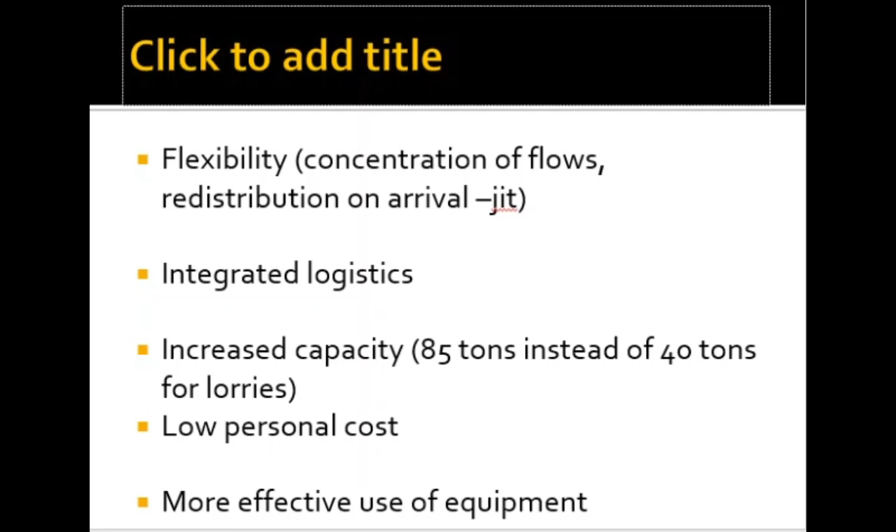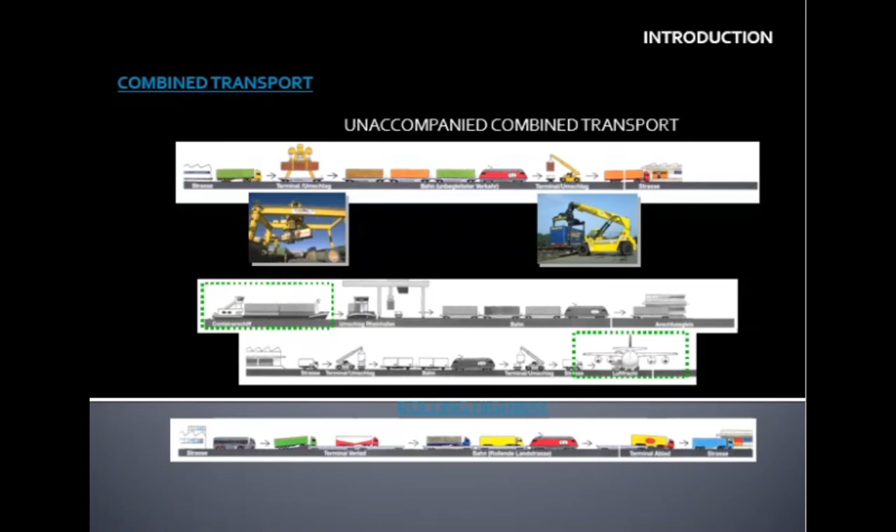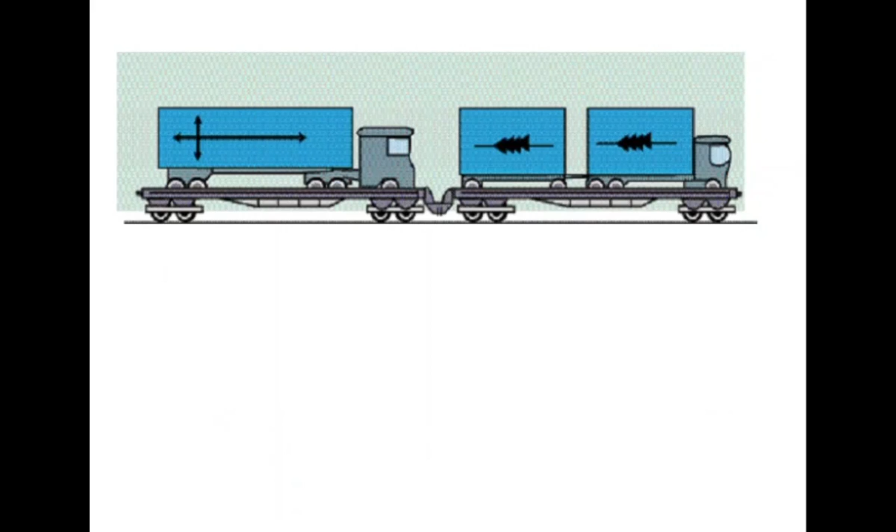Look at this slide carefully. You see that a whole lorry is placed on the flat track. That is what happens in combined transport. So here there are two flat tracks, and then there are two articulated trucks. One is a longer 40-footer, and one is a 20-footer with a trailer at the back. So this is accompanied combined transport.

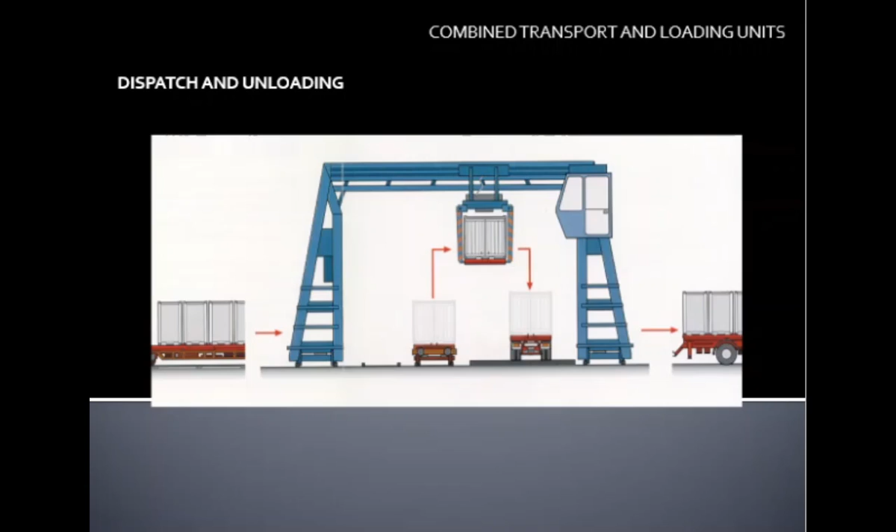This slide shows the kind of gantry cranes used for dispatch and unloading at the terminal for combined transport. You see the truck facing the other side, and the flat cars on the left. The lorry is on the tarmac and drives away towards the right. The train on the left side within the gantry crane brings the load, the swap body. The gantry crane picks it up, lifts it, and drops it on the flatbed lorry, which drives away. So the flat track of the train is on the left, the lorry is driving on the right. This is what happened at dispatch and unloading.

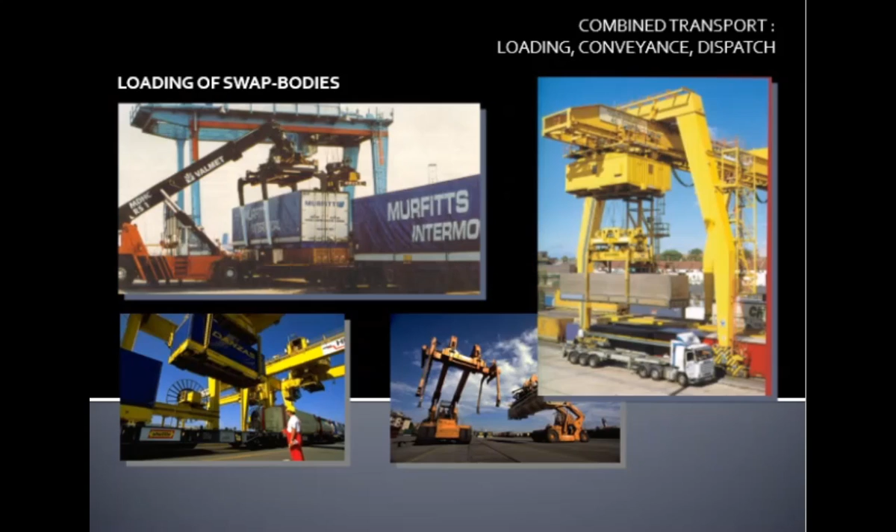A few more of the equipment used for loading and unloading is also shown here. Straddle crane, and the cranes on the left, I believe that is what has been installed at MPS, the new facility, deep sea at the Tema port. So these are for your viewing, and all sorts.

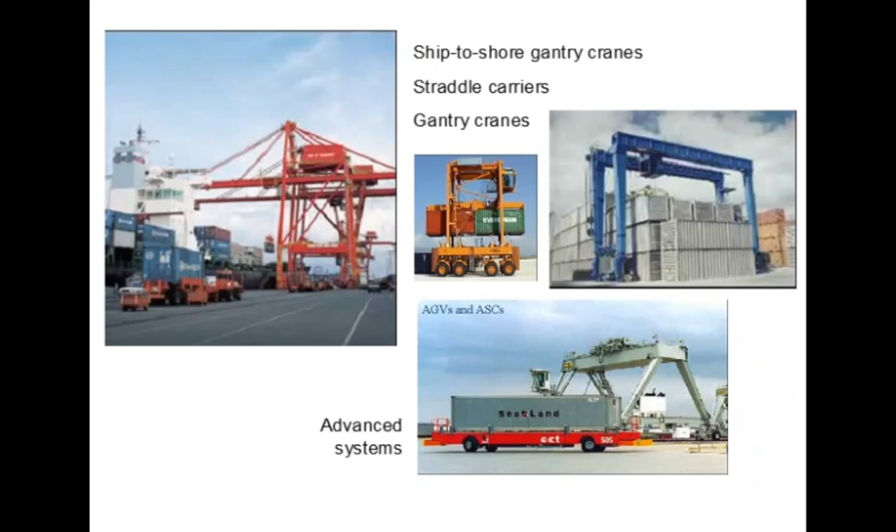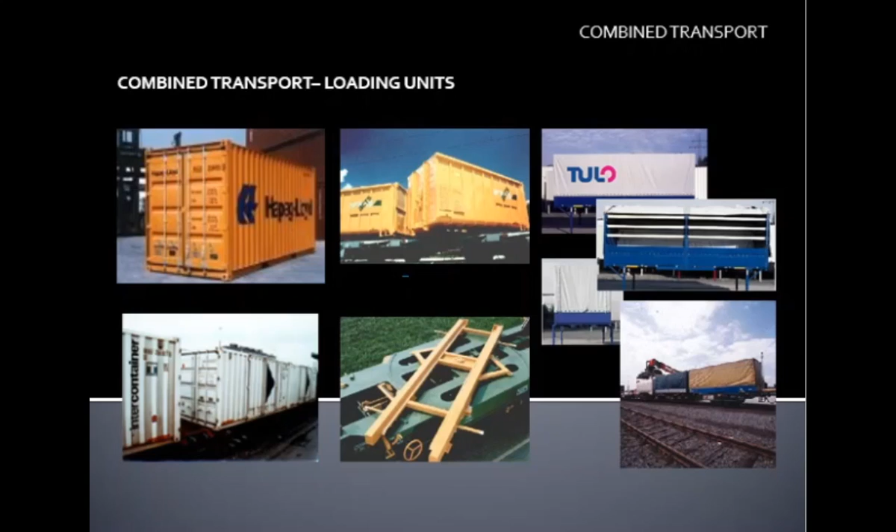The loading units typically used in combined transport includes swap bodies, which you have seen pictures of. A piggyback is where the swap body is lifted from the truck onto the flat racks, and they are towed away by the locomotive, and when they get to destination, they are lifted from the flat racks onto another truck to be taken away.

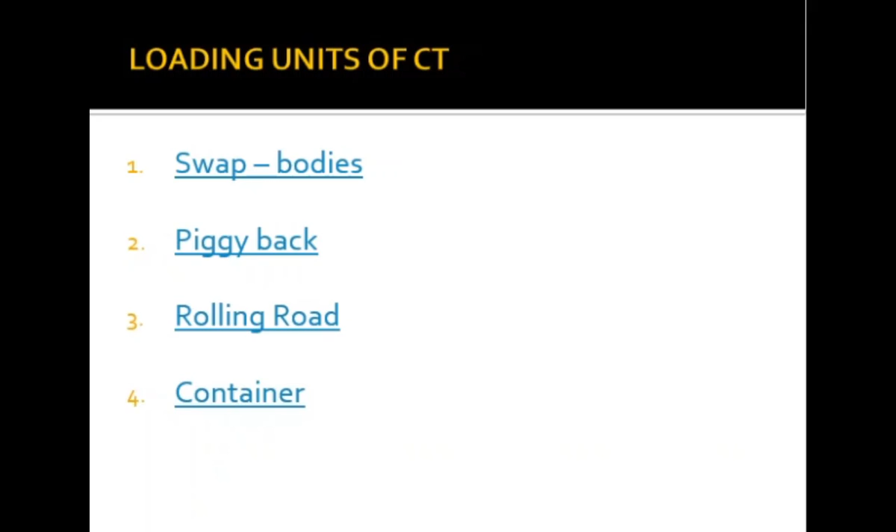Then the third loading unit is what we call rolling road. Rolling road is where trucks with the tractor and the swap bodies are driven onto the flatcars and carried away. That is what we call rolling road, and it is a loading unit used in combined transport. Sea containers of various sizes are also used as loading units in combined transport.

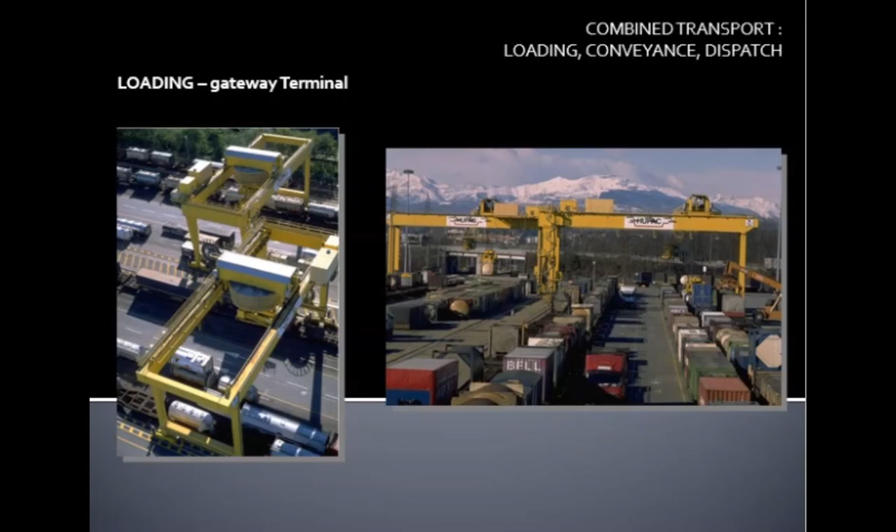This is how loading and conveyance, what we call dispatch, happens at gateway terminals. Gateway terminals, when you hear of them, are not any strange, sophisticated facilities. They are just facilities such as tarmac and rail lines laid alongside each other, and then with gantry cranes or overhead cranes, as you see from the left picture, used to lift cargo from one mode of transport to the other. This is how loading, dispatch, and conveyance is done at gateway terminals.

This is also what happens at the gateway terminals. You see there's a road, even a dual carriage road, but in between on the left is a road, on the right is rail lines, and on the far side you see a lot of rail lines. So the gantry crane can move alongside several stretches. This is a gateway terminal where the gantry cranes can move within its own tracks to transfer cargo from anywhere on the facility to anywhere else it will be required to be taken to. Gantry cranes are also shown in the picture on the right, doing the job at Busto.